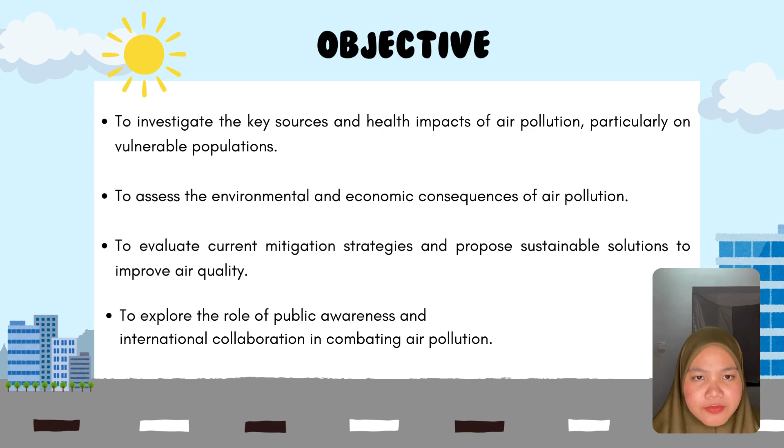It also emphasizes the role of public awareness in driving behavioral change and the importance of international collaboration in addressing this global challenge. The project emphasizes the need for collective action to protect public health and environment.

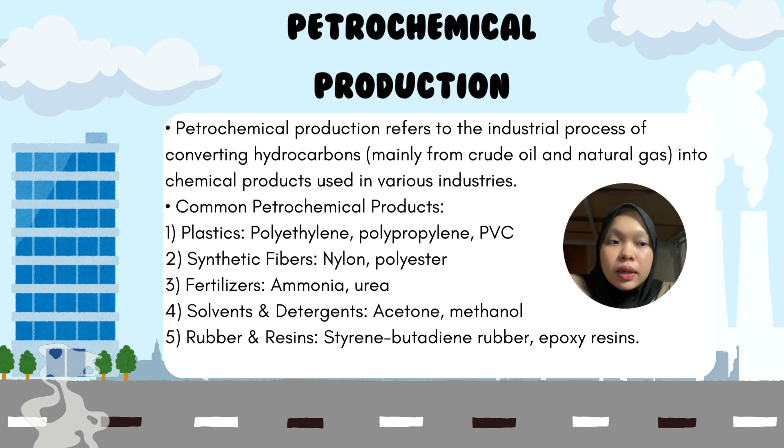And the last one is rubber and resins, such as styrene, butadiene rubber, and epoxy resins.

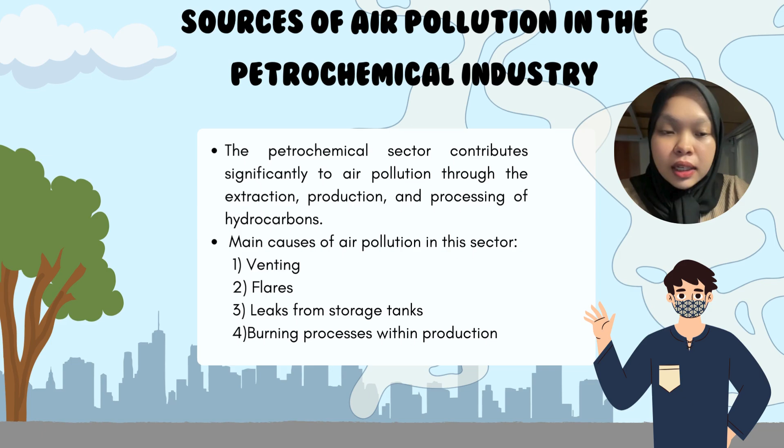For the source of air pollution in the petrochemical industry: the petrochemical sector contributes significantly to air pollution through the extraction, production, and processing of hydrocarbons. Main causes of air pollution in this sector are first, venting; second, flares; third, leaks from storage tanks; and the last one is burning processes within production.

Next is advanced technologies and devices. The petrochemical industry has adopted advanced technologies and devices for air quality improvements that specifically target pollutants and emissions reductions. First is flare gas recovery, second is electrostatic precipitators, third is wet scrubbers, next is dry scrubbers, and the last one is leak detection and repair, which is LDAR.

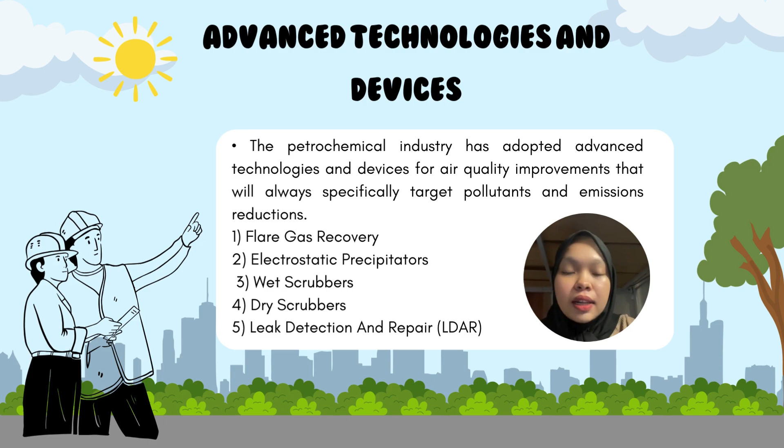Modern technology has an important role in fighting against air pollution, not only from the petrochemical industry but also others.

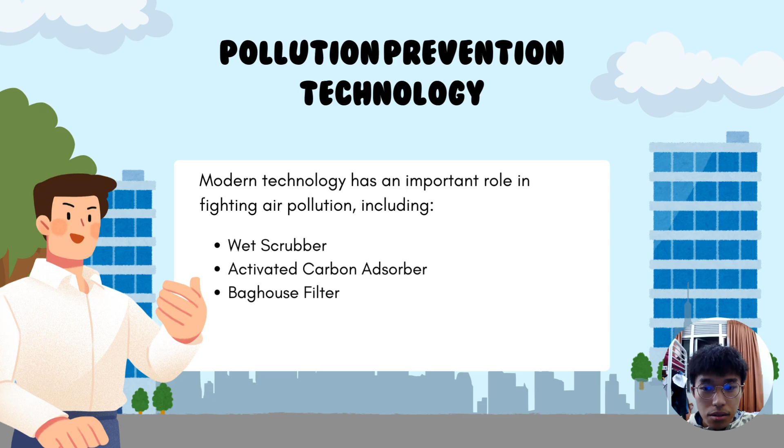We found these technologies that can help, which are the wet scrubbers, activated carbon adsorbers, and baghouse filter technologies. Now we will talk about each of their advantages, drawbacks, and efficiencies.

For wet scrubbers, the advantage is it provides versatility and gives a cooling effect to cool down exhaust gases. For drawback, one is funding issues, it needs more extra treatment which adds expenses. For its efficiency, it controls larger particles but is less efficient when contacting very fine particulates.

For activated carbon adsorbers, advantages are it supports volatile organic compound emission standards, and reusable carbon can help reduce cost. It's also compact and scalable. For drawback, it needs high initial cost and maintenance cost. Its efficiency is not suitable for managing particulate matter gases, so it needs to combine with other technologies to work.

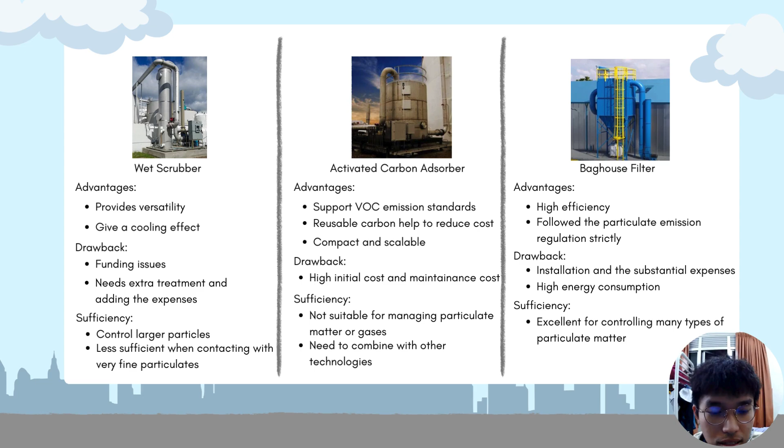And lastly is the baghouse filter. Advantage is very high efficiency, and it follows particulate emission regulations strictly. For its drawback, its installation and substantial expenses are significant, and also the high energy consumption for the baghouse filter system. And lastly, its efficiency is excellent, with high efficiency for controlling many types of particulate matter.

Hi, good morning. Today I will briefly explain the standard governing emissions in Malaysia, particularly for the petrochemical industry.

These emissions are regulated under the Environmental Quality Clean Air Regulations 2014, which is enforced by the Department of Environment under the Ministry of Environment and Water. The regulation sets strict limits on pollutants such as sulfur dioxide, nitrogen oxide, carbon monoxide, particulate matter, volatile organic compounds, ammonia, and other harmful substances.

These measures are crucial to ensure industry operates responsibly while protecting public health and the environment.

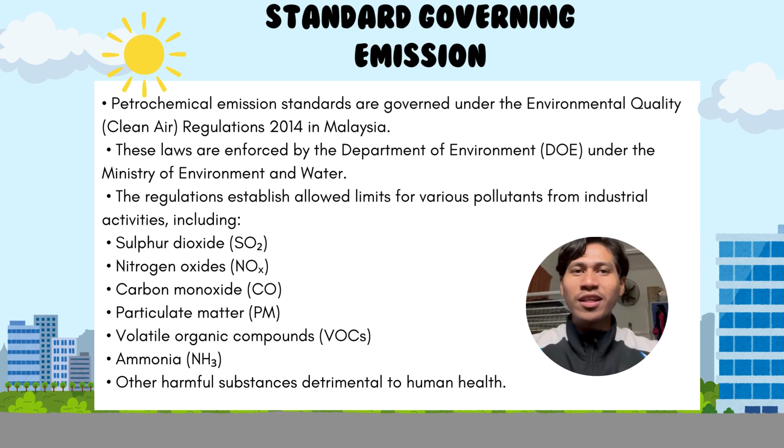Good day everyone. Today I will be presenting the best available techniques according to Appendix 2 provided in the instructions. Volatile organic compounds, VOCs, pose significant environmental concerns in petrochemical production, and various control strategies have been developed for their management.

Recovery and reuse technologies include adsorption, which employs porous materials to capture VOCs and can be regenerated for continued use; condensation, which cools vapor to reclaim VOCs in liquid form with recovery rates of 50 to 98%; and absorption, where liquid solvents absorb VOCs before being incinerated.

Destructive techniques such as thermal oxidation incinerate VOCs at high temperatures, achieving 95 to 99.9% efficiency, while catalytic oxidation uses catalysts to lower the reaction temperature. Biological treatment methods leverage microorganisms to decompose VOCs, especially effective at lower concentrations.

To control VOC emissions from storage and transfer, strategies like external floating roof tanks can cut emissions by 70 to 90%, and fixed roof tanks with internal floating covers can reduce emissions by 70 to 85%. Implementing high quality equipment and leak detection and repair programs further minimizes fugitive emissions.

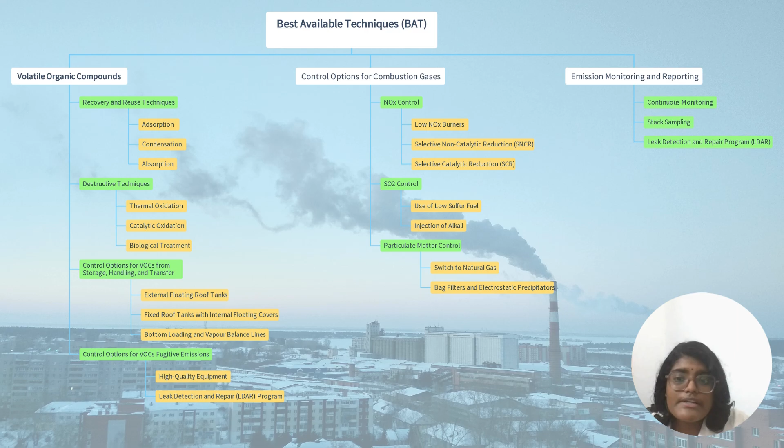Emission monitoring through continuous tracking and stack sampling ensures compliance with environmental standards, while regular LDAR checks help in early detection and repair of leaks from various sources. These measures collectively contribute to reducing the environmental impact of the petrochemical industry while adhering to regulations.

Now we are going to look into the comparison of actual devices used in the production of the petrochemical industry.

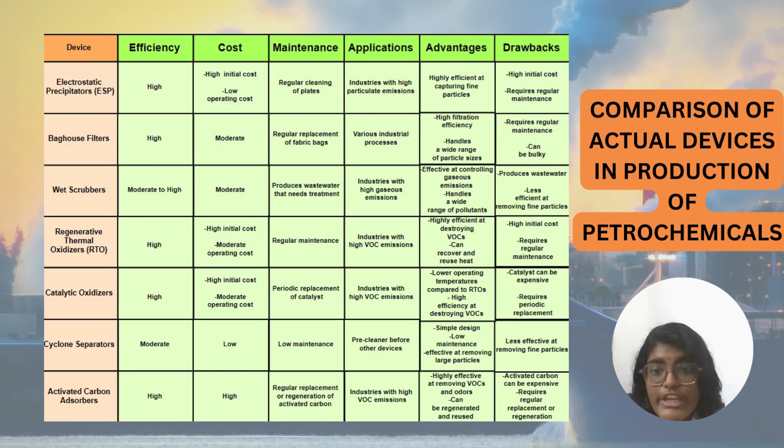Lastly, activated carbon adsorbers are highly effective at removing VOCs and odors, but come with very high cost and require regular replacement or regeneration of activated carbon, commonly used in chemical manufacturing and wastewater treatment.

New pollution control technologies such as flare gas recovery systems, selective catalytic reduction, activated carbon filters, and electrostatic precipitators have proven efficient in lowering emissions. The use of BAT, best available techniques, has also enhanced the industry's adherence to environmental rules.

Addressing environmental concerns necessitates regulatory monitoring, technological improvement, and collaboration between government, corporations, and communities. A comprehensive approach combining modern technology, strong laws, and educated public engagement can result in a cleaner future.